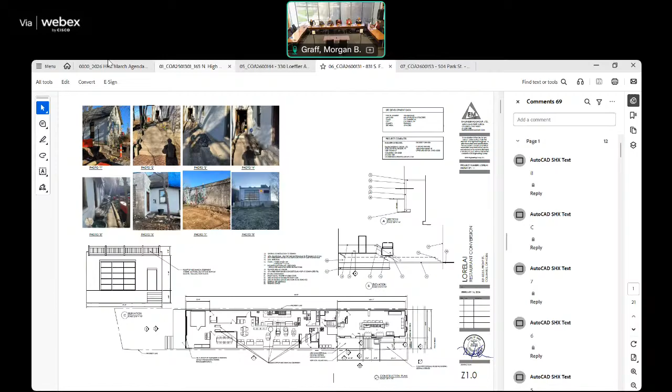On to certificate applications for certificates of appropriateness this evening, starting with the continued applications, application number 1, COA 2501301, that's for 165 North High Street.

Is there anybody here for that? If you could come on forward. And we need to make sure that microphone is on real quick. Perfect. If you could actually stand up real quick, I gotta swear you in.

Raise your right hand. Do you swear to tell the truth in testimony before the commission this evening? I do. If you could state your full name and association with the property for the record. Christopher Jolly of Darin Ranker Architects, the architect for the project.

Wonderful, thank you. All right, Morgan, I'm going to get set up here a little bit, guys.

Thank you very much. All right, so this is to convert second and third floors from offices to apartments, remove existing fire escape on the north elevation, and install new egress stairs to meet building code requirements for apartment conversion. Staircase to be painted vintage gold, install new 6-foot steel security fence around the bottom portion of the stairwell, convert 2 existing windows on third floor and second floor north elevation to new full light aluminum egress door with transom, convert existing third floor door on north elevation to new 1/1 window, and repair windows on front, east, and north elevations.

The application is in response to a code violation from September 2024 for the removal of sashes without a certificate of appropriateness. HPO staff conducted a site visit on September 9th to view the current conditions. As noted by past staff, there is a mix of window styles on the property, including on the south elevation arched 1/1 windows, 9/9 windows, and 4 stained glass windows. The north elevation has 4/4 windows and 9/9 windows. On the east elevation there are 1/1 windows with decorative transom, skinny arched windows, and stained glass with entryway.

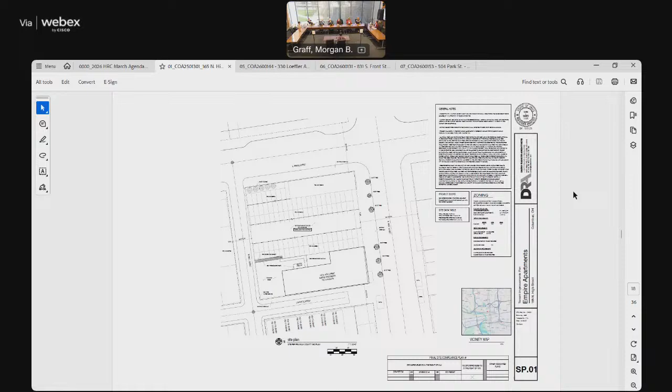Thank you, that's all. What would the applicant like to add at this point? And then we can open up to discussion.

I'd just add that the majority, or all, of the windows to be repaired were essentially vandalized, from what the owner's told me. So they're looking to repair those to be like original. Any missing sashes are not on the property, nothing that I've seen or the owner's aware of that exists.

So they would need to be recreated to match the existing windows. There are different pieces and parts of different windows that are missing, but I think there's plenty there to be able to match what we have, using adjacent windows to know what that configuration is and make that match happen.

As far as the internal layout, last time it was discussed, we looked at how that would affect things if we left the fire escape where it was, and that's this layout here. So we have a tiny studio apartment in that upper left corner, off to the left side of the plan, and that size configuration would not meet building code.

The entire unit is only 232 square feet. The combined living and kitchen space is only 160 square feet, whereas building code requires 190 square feet. A separate bathroom and closet space are also required, in addition to the 190 square feet.

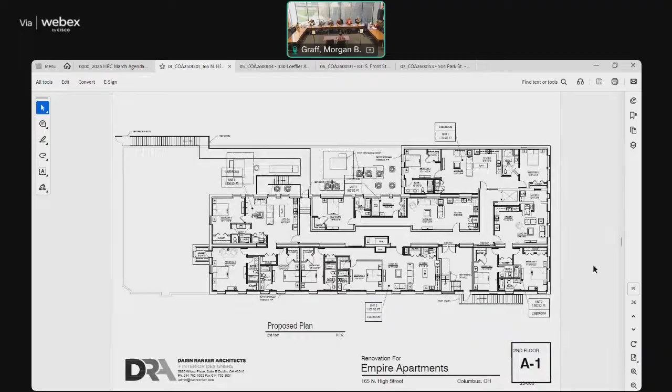Did you receive a copy of the comments we provided in the packet, to submit any revised materials or additional follow-up so we could get some of the questions resolved? No, I've not seen those prior. It's in the application under the portal—that's where they're normally uploaded for business feedback, always.

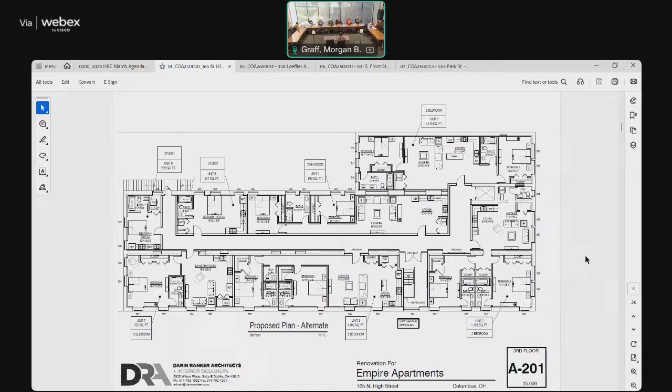We just want to make sure you get feedback related to the fire escape, especially because it is going onto what is a legally separate parcel, and that BZS is comfortable with that, since you're extending onto another parcel of land, even though we believe it's owned by the same entity. We want to make sure there's no other technicalities—you may need variances or other things to address and appease them. We don't approve variances, but we are a recommending body on that kind of thing, so there's some due diligence that still needs to be resolved there.

I would open that up really for the conversation to the rest of the commission here for other things that the commission saw. We generally don't rule on the inside. We have no authority or jurisdiction on the insides of buildings such as this. But we did want to know what was the impact or what was driving this, looking to put a new fire escape in. Thank you for at least the information on that. But I'll turn it over to other commission members.

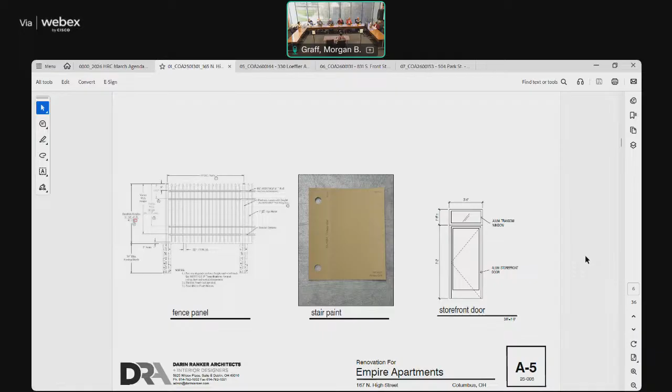I would like to address the railing and the gate. It looks like the gate, I'm assuming that's probably aluminum. It looks like it has vertical members with little spear tops.

We've allowed that type of thing before, I think. However, the railing on the staircase is horizontal, so you have vertical elements and horizontal elements bound together in the same configuration. Generally, we have not allowed horizontal railings on historical buildings because that's more of a 21st century aesthetic. If you made those vertical, that would maintain consistency with the gate you're proposing.

And we may want to talk about the gate a little bit more as to whether or not that's the appropriate look with it. But certainly there should be consistency between those, between all the wrought iron or the aluminum metal work.

Really good point. I think you've raised most of the questions I can think of. Were there other questions, or is this comments?

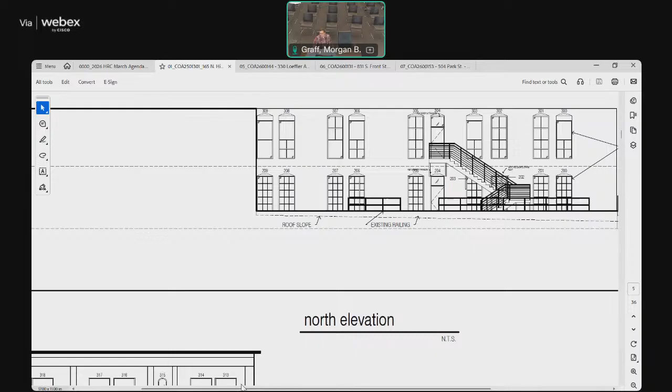Is this your first time in front of the commission? December previously. Okay, but this is your first big project in front of the commission?

Yeah. Okay, all right. I would encourage, I think we would all encourage you to work with the officer here so she can help you with where stuff is, and if you have any questions about any of the feedback, we're happy to help. I get that it can be overwhelming at first, so we'd like you to be successful.

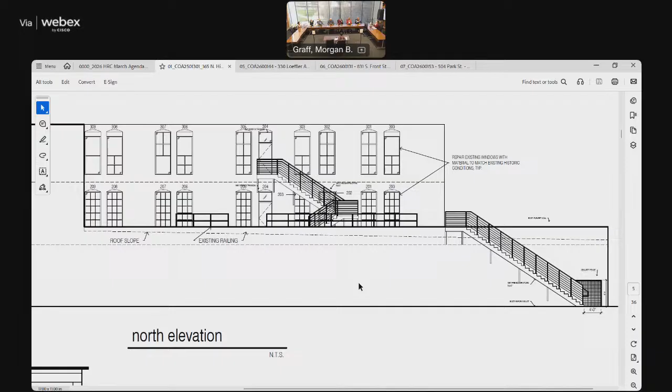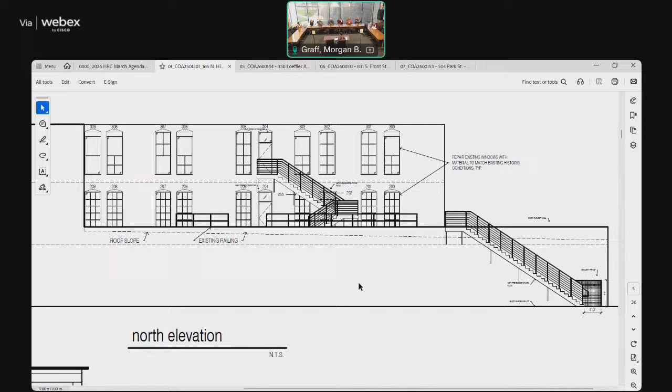I think with the layout, I appreciate your explanation of why the new location. Did you study rerouting the hall in a different configuration, so it wouldn't necessarily have to be exiting that way? It could come horizontal on the paper for a bit. So if you jogged elsewhere, does that create a different potential pathway for preserving more of the existing door opening? Or does that create a unit problem?

Yeah, it just makes, when you start, you end up with a Z-shaped hallway. So it just kind of ends up being a little funky on the inside with that configuration, and you end up with some pretty skinny spaces on one end or the other. But that could certainly be looked at, it'd just be a little bit.

Yeah, you might do it and we might say that's not reasonable to request that. I think usually we try to exhaust the different options though, and make sure it's understood that the current configuration doesn't make sense as it relates to code. But just make sure, when you resubmit and come back, that you feel like you've really exhausted all the options and can show that to us.

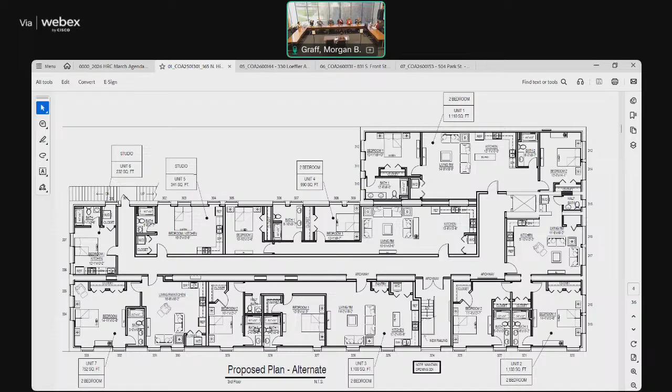The other piece, I know you've been working on this, and I appreciate the progress we've made with how you've documented all the different windows, because previously it was hard for us to understand which windows were getting which treatments and what kind of condition each of them was in. So the key is really helpful with all the photos, so appreciate that.

The one piece from the business meeting that I still had a question on, maybe some of the other commissioners did as well, was that your detailed catalog here looks like it's showing windows on elevations which aren't drawn. And I'm still a little confused about which elevations you're proposing repairs for completely, because we're only seeing, I think, mostly the north and the east facade, north elevation and east elevation.

And then in the plan, you have window numbers on both the south and the west as well. And then it looks to me like there are detailed photos of windows on the south and the west as well. So that's the part where I still haven't figured out completely where all you're proposing changes to. So the elevations were provided for reference because mostly the exterior change is really just the stair.

Any of the other windows, the only change to windows is moving the one window for the door. Everything else would be looking to restore it to its previous condition. So that's why we don't have necessarily elevations of the others drawn. It's just images of the condition and noting what we would need to do. But for this window...

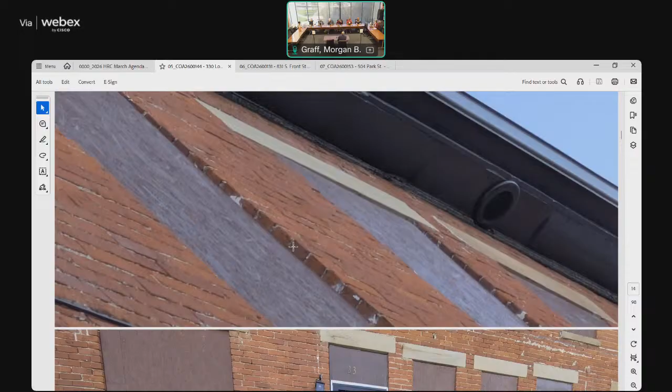We conducted a site visit on February 12th and noticed other changes that have been made since that prior approval: installation of 2 security doors, new front entry sconces, new exterior outlets next to the front entrances, inappropriate mortar application and mortar type, installation of laundry ventilation through the soffit on the front and rear, and installation of house numbers through the brick.

The commission asked the applicant at the past March business meeting to provide detailed drawings of how they will be finishing and trimming out the dormers on the front. The commission will recommend cladding the dormer cheek walls with recycled slate or alternative wood cladding instead of the proposed asphalt shingle. They would not support retention of the security storms or security doors, but would consider a full light storm. They asked the applicant to provide reasoning for the installed venting in the soffit, and the commission requested a fence drawing detail to show what the screening for the AC equipment would look like.

At this time, no revised materials have been submitted. Staff recommends approving application 2600144, 330 Loeffler Avenue in the Bryden Road Historic District, as submitted with the following clarifications noted.

Clad the exterior dormers with lap wood siding with a reveal between 3 to 5 inches. Final paint color to be submitted to HPO staff for final review and approval. Clean up the mortar on the chimney. Remove existing security doors and install a full light storm door, with product specification to be submitted to HPO staff. Submit final fence design and fence coating to HPO staff for final review and approval. And install house numbers through the mortar, and patch voids in the brick.

Basis for the staff recommendation is 311611, standards for alteration, as well as 311613, standards for site improvements, and the Columbus Register of Historic Properties, chimneys, pages 28 through 29. That's all from us. Thank you, Morgan.

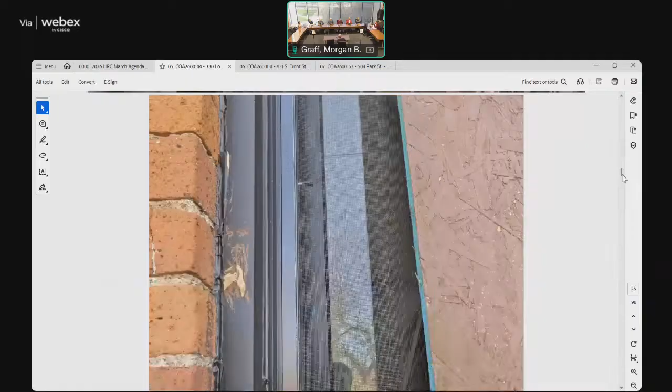That was a pretty lengthy, but sorry, in-depth report. I do want to note for the commission here, staff's recommendation here was to move a lot of this to them to resolve and work through, and you feel comfortable with that potentially as a recommendation? Okay. I know no additional material has been submitted, but I would like to open this up to you to add whatever you may want to add before we have our own discussion and see where things go. It's the first time for me, 30 years in the business, but I've never had this situation.

The contractor took her money, so she's gone. You walked into all this? Yes, it was all... you've done nothing?

I've done nothing to the exterior other than cleaning it up for the HVAC contractor. We have to put the outside splitter unit and the condensing unit right there where those bushes are, so we're in the process of cleaning an area up for them. But everything else we've been doing is interior.

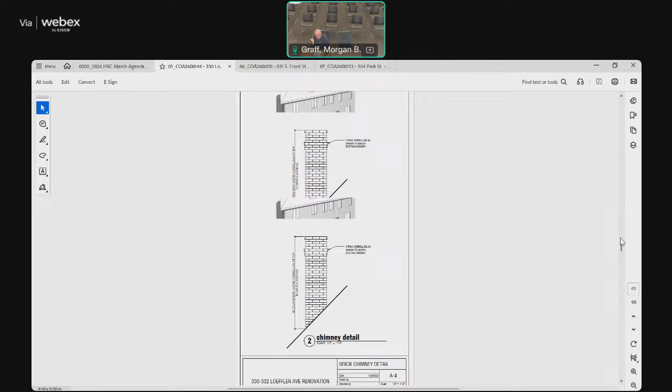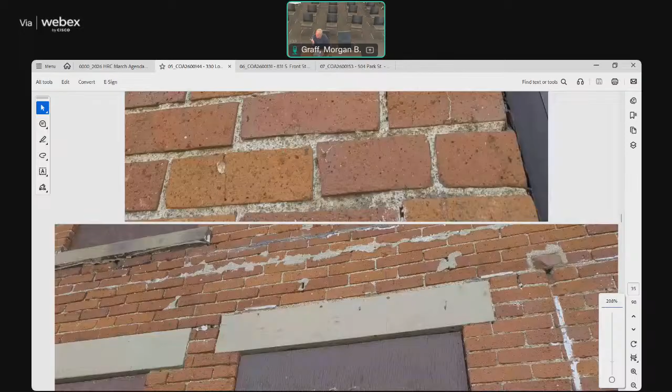The previous contractor did the soffits and venting. We put two... they didn't vent the bathrooms on the third floor. The third floor was converted to living space. We did put two boots on the roof for the venting for the HVAC bathrooms. The previous contractor put those in the soffit.

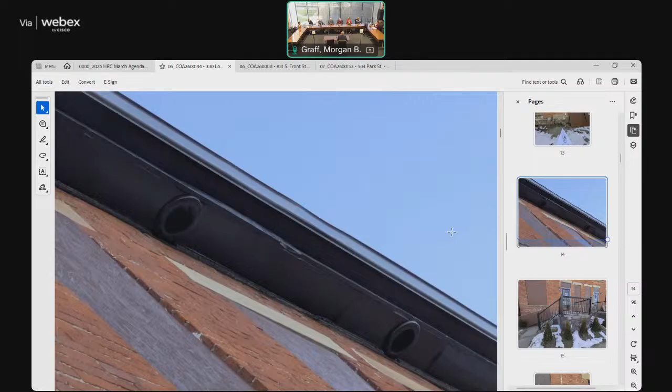We have, in unique circumstances, had a few of those actually occur before. I think the last time we saw that was maybe in the university district. We've had that specific issue, but we wanted to hear why, what was going on, when things just happen on the building sometimes. It's not that we're going to be inflexible, we've just got to know why and what happened.

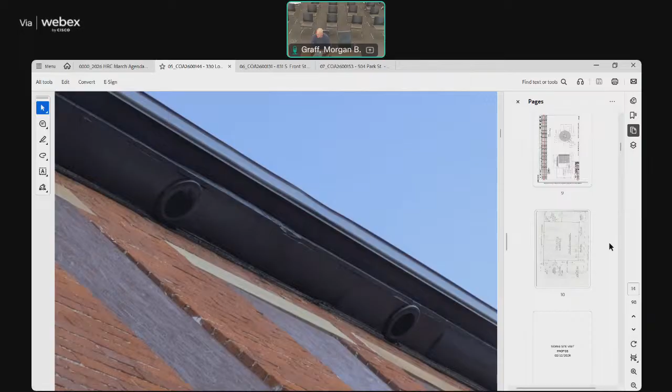The laundry is on the second floor now. They designed it for us on the second floor. So, I mean, we could find a chase to get to the roof probably, if that's not acceptable at this point.

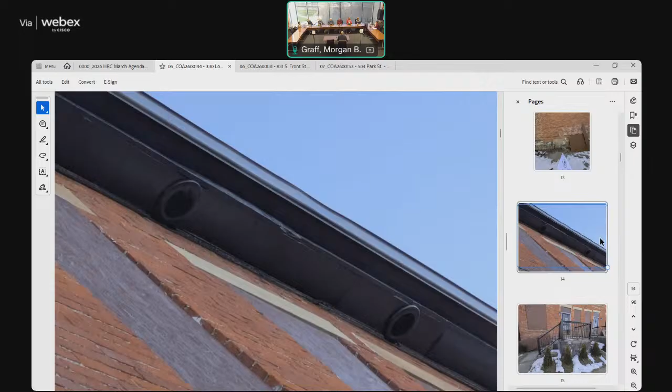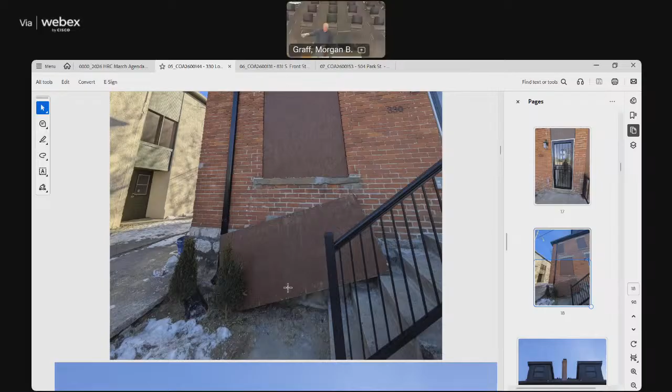That's why I'm here, because I want to know where I'm going and how to get there. As far as the downspouts, it's concrete everywhere, so I don't know—do we run a pipe along the perimeter to the front and then pick that one up and kick it out? Well, unfortunately, I don't know that we could give you the advice on that. We can only give you the advice on what you're going to propose for a solution.

That's really a stormwater issue, I think, with the city on code. So you would have to see what BZS and the building department's going to require from a stormwater treatment standpoint. But your design solution, you would then seek approval from us—we can't dictate the building code and the permitting process and what's going to be required for how to treat the stormwater.

Okay, so we're only proposing the final solution to you. And I don't know if building and zoning services or the permit department's going to require any calculations, those kinds of things. I don't know how many units trigger handling stormwater differently. So I don't want to say we can't offer that advice, but whatever you end up needing for a solution based on whatever they tell you code is going to require, and whether it involves a designer or not, I don't know—that's when you would bring that next step to us.

Right, so a PVC pipe from the back to the front, laying against this building, exposed—is that possible? I don't really think so. I don't know that we've ever had such a thing. Typically it's buried below grade.

But again, as Commissioner McCabe's saying, just check with BZS for code purposes. If you do get to that point where you are going forward for the drainage, you can always reach out to us—that could be something separate, because that's something we typically can review administratively. Because you don't really want a downspout running across the building at an angle down to the front.

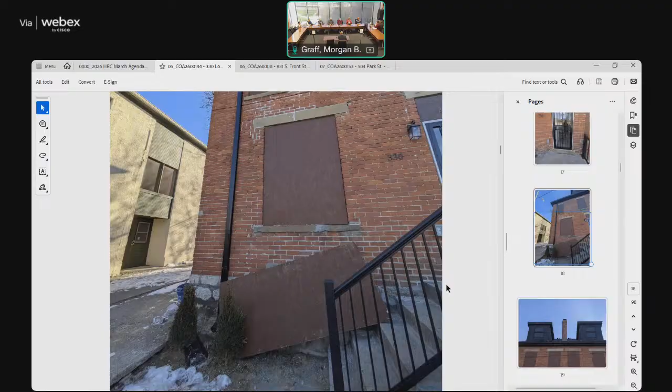When we were referring to it before, that code violation—it was more, I think the contractor before had like a half downspout on the building instead of a full length. So if that's what you're referring to, Glenn, for that one, yeah. Okay, and then another issue is the tuck pointing, so it's kind of convoluted.

You gave me a couple of pictures circled where the graffiti was, there, and a couple other spots. What's the determination as far as, this is the homeowner saying we do this part, and then you come back and say well there's this part. So is there any kind of a rule as far as where you're saying here, well you need to do this northwest corner, southwest corner, chimney?

I think some of the issues is there's really poorly done tuck pointing. That's new work, and it's not consistent with the historic guidelines and what you see in general historic practices. I think we're very concerned because, was the correct mortar used? If not, it's going to cause more damage to your brick in a very short amount of time. But we definitely have to, it's very obvious. Morgan can probably scroll to a picture of really badly done newer tuck pointing work.

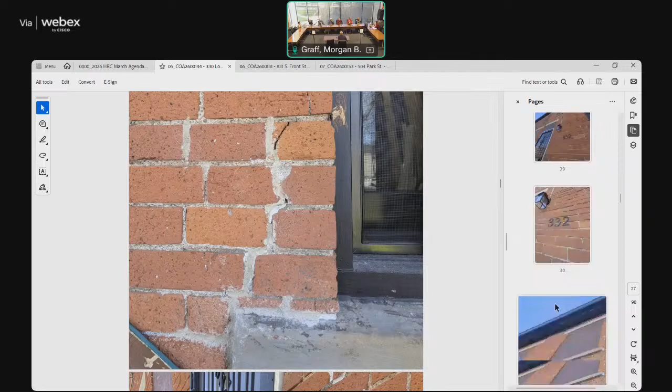Yeah, that front, they did some stuff on the front. And then the sandstone foundation, they did all that in, yeah, that's a good example of where it's kind of halfway done. So, is there a standard of where this void is too deep, so this needs tuck pointed?

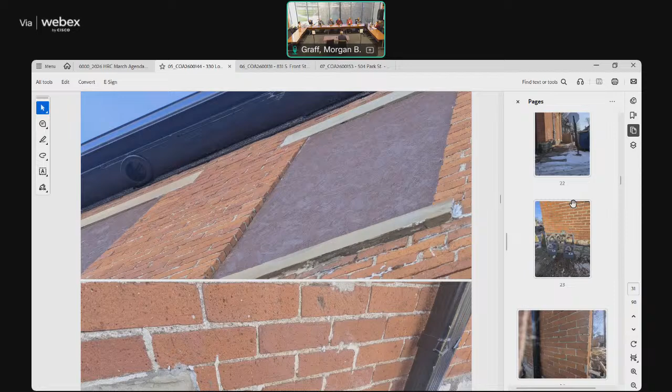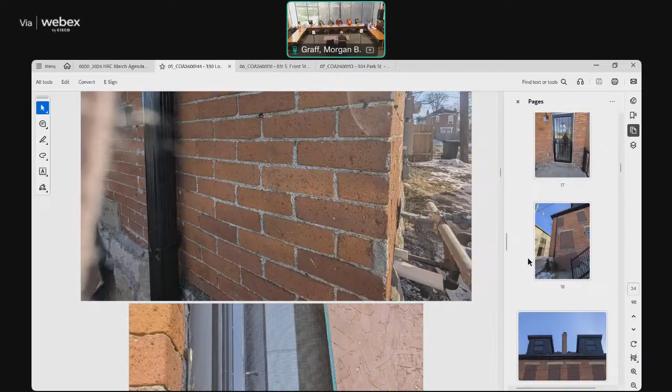What I'm going to say is I'm going to defer to the guidelines. We do have guidelines and there is city code on historic preservation, read up on that. And really the type of mortar needs to be submitted to preservation staff for approval. I think they did, type N and the coloring looks to be matching, so white Portland type. So really, some of this may be alleviating some of the cleanup.

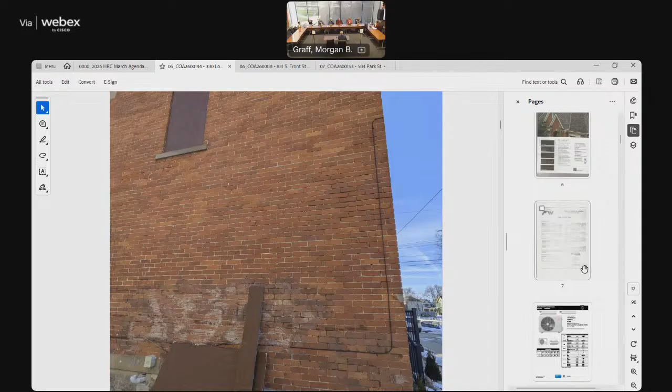And probably there's some spots you probably want to get a little bit more watertight, and the chimney just needs cleaned. What about the size, where they made the chimney bigger or something, that one? I mean, that's really, I admire they put the chimney back. They tried, but the tuck pointing just really ruined every effort to put the chimney back. And they also put it back in a different place than where the original one was.

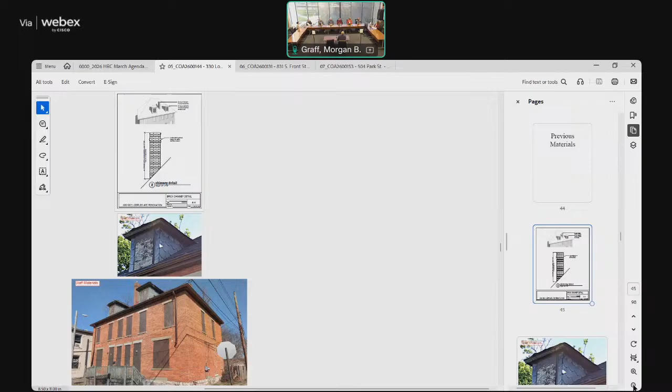And they also made the dormers bigger, right, even though it was approved to put the chimney back in the original place. There's even a drawing showing that. However, I guess that's something that we need to decide, and looking at it, you're not responsible for it. I think I can live with it. I think it's an element of the design.

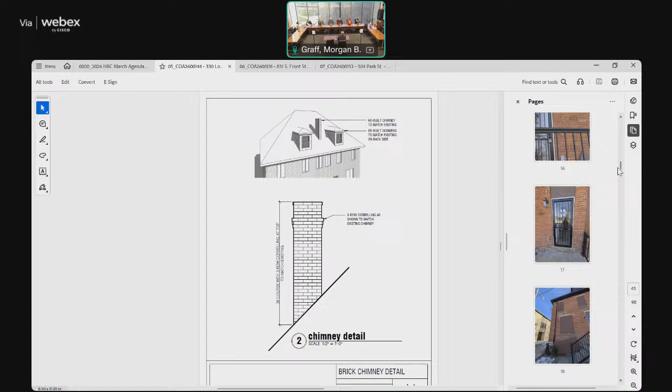Does it still serve the same purpose, a few feet further? It's probably okay. And it's just floating, right? There's nothing under it. Right, and the chimney? I mean it doesn't, yes that's between the two units, so that goes to the firewall, basement, sits on the firewall, goes to the basement. That's actually where we're using the chase to get the splitters up.

Because they didn't want them on the outside of the house. So is it where the original chimney was? 'Cause yes, oh there we go. Oh then it's okay, that makes sense. Okay, that makes sense because in the drawing it hugged it to the, in the drawing it's further up on the roof. Yeah, and that's where we're confused. So okay, so you're good on that, we won't worry about that.

A little bit of cleanup on the dormers. I personally am okay with the larger size, but let's talk about how you're gonna finish the surface on it. I think you've got some idea. Staff ultimately recommended, consistent with what I think a lot of the commission sort of thought was okay to go, which is, even though it isn't original, a cladding.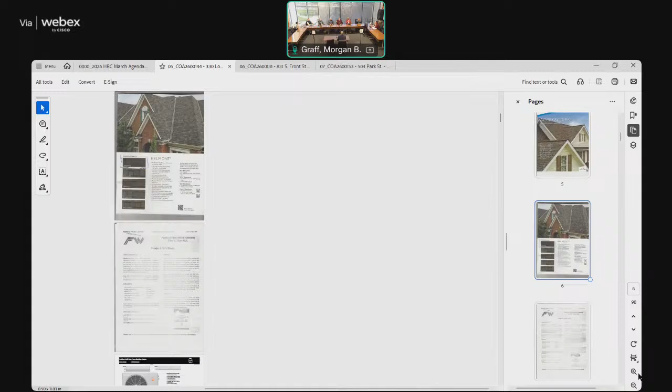A slate, you pick up slate, it looks like slate. I don't need that either much, I mean it's gonna cover that thing in slate, or we were willing to say okay, go with siding, but you have to have trims at the corner and you have to have the trims at the head, sill and jamb of the windows. And somebody's just got to sketch it up and show where the 4-inch piece goes, what it looks like.

I think we were all willing to compromise, and even in the staff report there's a compromise recommending that you're able to clad it, though slate would be a much better choice if you want to win some favors. It was an option we left out there, but you have to propose something, and we have standards on that. We'd look at it to make sure it makes sense - what a decent proportion, size, and corner configuration is going to look like, what it's going to look like with head, sill, and jamb conditions with trim, and whether it's wood or smooth face Hardie, or recycled slate for the dormer treatment. We can't be your architect - you have to propose to us what the corrections need to be. But the slate synthetic roofing materials, no.

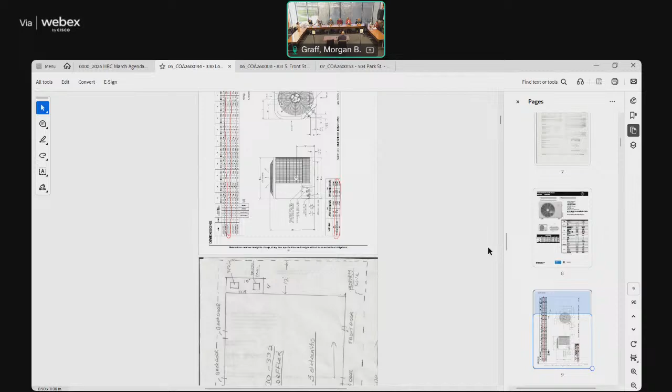So it looks like the recommendation is to move to staff approval. The one I'm curious about everyone's opinion on is reinstalling the house numbers and patching the voids in the brick, since the brick has already been damaged. Is it better to pull it out and reinstall it and then patch the brick, or just leave the numbers? I know we don't want to encourage that behavior, but I don't know what's the lesser of two evils. I think it would be better on the brick not to pull them out and re-drill and do all that.

We might be in a better place to overlook this portion, because if you look at where those holes are, between moisture and re-drilling, those bricks are going to crumble. See how close those are to the tops of the bricks? There's going to be nothing left, and there's maybe no way those are going to hit the mortar joints either, even if you moved them or did them at an angle. The pre-drill on the numbers is definitely not going to match up with the mortar. We could put them on some kind of flat plaque instead, and that way you're not doing more harm to the brick except for the plaque.

But I guess the fair question is, is the damage already done? Is it better just to leave it as is until a future replacement of the numbers occurs? I'd tend to agree, especially if you look at how close it is to the edge - you're going to pull that out and you're still going to have the hole. You can't undo the hole. But if we put a plaque over it, would that protect it? If you put a plaque, then you're just creating a bigger element on the brick and the brick's still gone, and maybe creating a moisture trap. I'd rather just leave the brick the way it is right now.

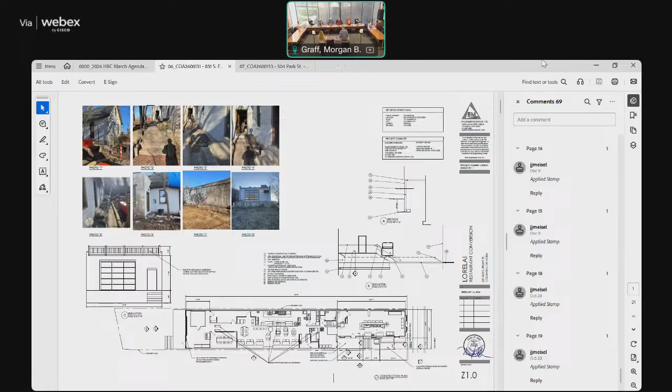If you could both remain standing and each raise your right hands. You each swear to tell the truth in your testimony before the commission this evening. Yes, we do. And if you could each state your name and association with the property for the record. Bronte Clifford, I'm the owner of the building. Scott Malley, the architect.

This is to convert a vacant building into a new restaurant, install new rooftop mechanical equipment screen on the rear roof with bottom and top rails and 1x6 slats to be painted black, remove existing steps and grade along the south entrance, remove existing limestone steps from south-facing entrances, regrade walkway entrance to be level with the public sidewalk, walkway to be concrete, and install new concrete steps closer to the entry door.

Install a concrete slab over CMU block for the entry stoop, new 36-inch metal handrail and 42-inch guardrail, and a new incline platform lift on the south elevation, along with removal of existing limestone steps from south-facing entrances. The property owner received previous COAs for painting and roof replacement.

From past records, it appears the steps and entry walk were redone around 1994, which included replacing the existing concrete steps with limestone steps. Looking at current photos, it appears the current steps are made of concrete with salvage stone brackets, while the two south-facing entry points have limestone steps.

After further review of the property, it appears the rooftop mechanicals were installed prior to approval, as well as a new garage door, repoured concrete step and porch, and gravel pad on the rear. The applicant responded, noting that the rear elevation work was performed prior to the current owner owning the property. According to the applicant, the rooftop mechanical equipment has been placed on the roof for storage.

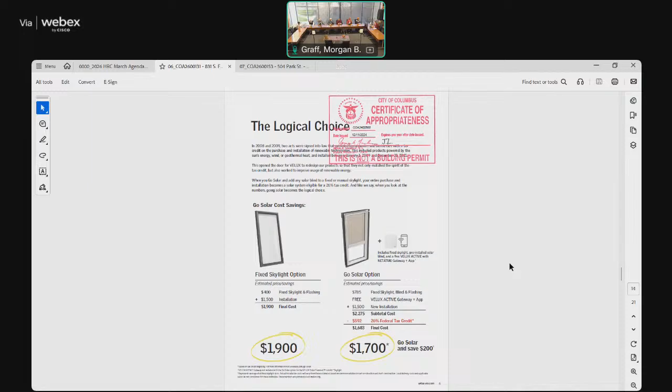Regarding the side of the property, will this expose the existing foundation? If so, what is the treatment plan for the original foundation? How will the lift be installed? Will it be on a railing or on the elevation of the building?

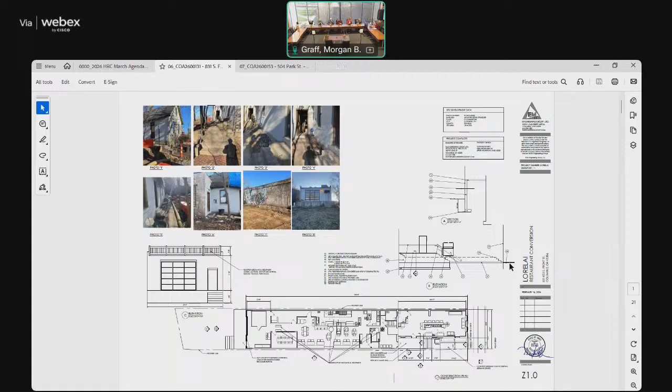Commissioners asked the applicant to provide landscaping, if landscaping is to be included, and to clarify that all entrances and openings are being maintained, updating the elevation drawing to include all openings on the south side. Commissioners should offer design feedback that can be utilized by the applicant to further refine the proposal for review at a future HRC meeting. No action is required. Basis of staff recommendation is 3116, standards for alteration.

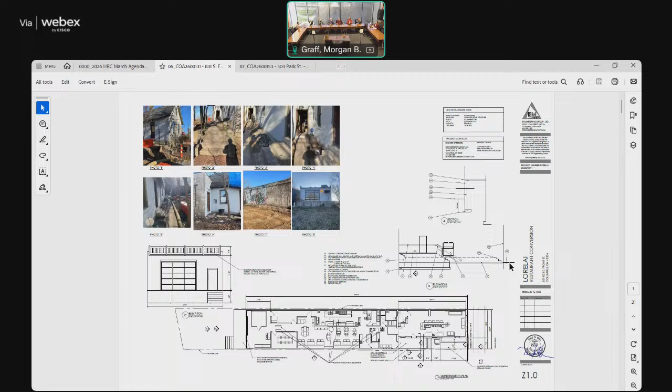Thank you. Wonderful. It is a conceptual review, so I'll open it up to you to add some color here and talk to us about the project.

Well, we talked last week about getting rid of the railing in the back, since we don't need it, can't see it. Everything is moved forward. There was a miscommunication in my office, the revised drawings did not get sent back in by the 12th.

But as per our last meeting, we're getting rid of that railing in the back, as long as you can't see the equipment, I think. Not at all. Most of us were fine with that. The railing actually added more of a distraction than anything, and it wasn't really appropriate for the historical context of the building anyway.

Right, so like you say, the rear door and the landing in the back were done previously. I don't know if you need us to do anything at this meeting or next meeting, but that wasn't brought up last time, so I didn't know.

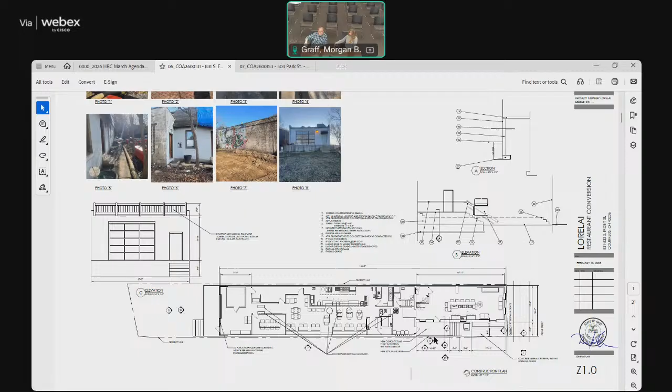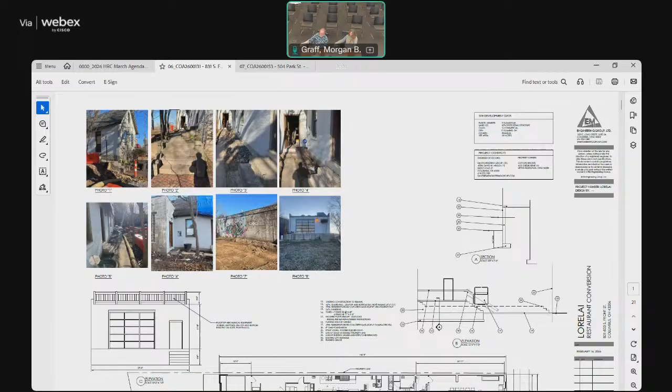If anything, just walk around the exterior alterations for us. Where we take out the front sidewalk and lower it to the street level, it's going to match the front of the building. It's the same stone, except on the side, I'm sure it's just full of dirt. The front is the same thing, they've just mortared in between each one, so you can see all the stone. There it is on the front.

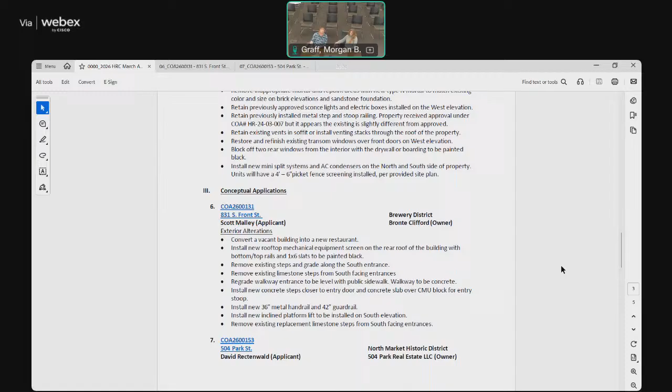We're going to use, well, they wanted to use simple pipe railing for the handrail, but you've denied it, so we're going to go with a wrought iron. What I would ask on that is just submit a drawing. And it needs to be vertical from what I heard last time. Yeah, typical wrought iron, that's a good cue, you're safer to propose that. We can't prohibit you from proposing anything you'd like, but given the character of this building, I've never seen vertical or horizontal wrought iron too often anyway, and those gaps have got to be filled in so the kids can't fall over the edge.

Yeah, we're proposing to do that same stone all down the side until the new landing. The doors are going to stay. So what'll happen is you've got these 3 or 4 steps up right now for the sidewalk, you're gonna take that out, that's gonna be excavated out, and more of that foundation wall is going to show. So you're then gonna re-tuck point that foundation wall that will be showing, is what you're saying. Yes, and you're just gonna leave it exposed down the entire length of the side then? Yes, it'll match what's there.

What's going above the door? You're gonna have a custom transom or something, or from the opening? There are 3 doors right now to get around that side of the building. We're building the ramp to match the 3rd door. The other 2 are just going to be hanging in space. Seal them shut.

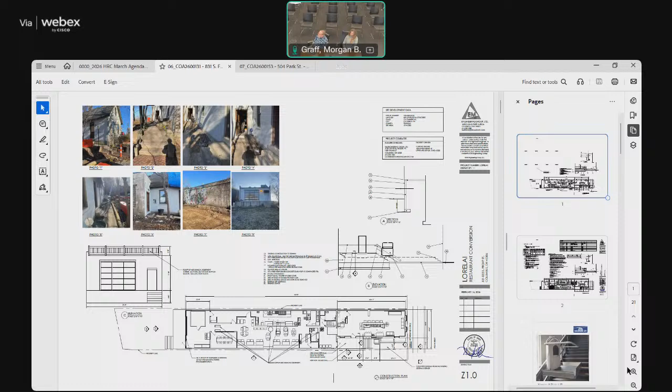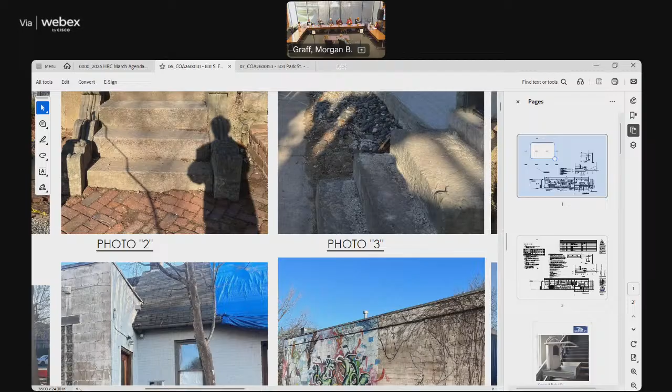So that's the first one. Right, and which of these 3 are gonna be dropped? Or does it mean all 3? You're not dropping any of them? I thought you were reducing the height to get down further, or no?

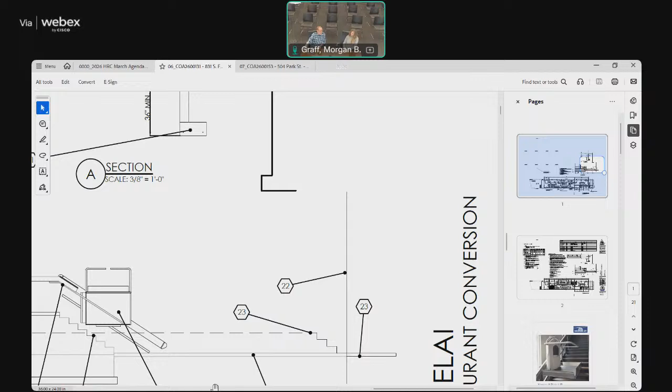I misunderstand. The grade is going down lower. The doors are going to be hanging in mid-space when the sidewalk goes away. There'll be a door here. I see, like 3 non-conforming steps coming out of those doors anyways.

So we're going to bring it up to the first 2 doors on the inside. There's like a 4 to 8 inch difference in steps, I forget what it is. So we're going to ramp up on the inside, so the 2 doors are higher than the other door. We can't make a match, so we're just going to leave those other 2 doors there and build the ramp up to the 3rd door. It'll be the main entry and the fire escape from that area.

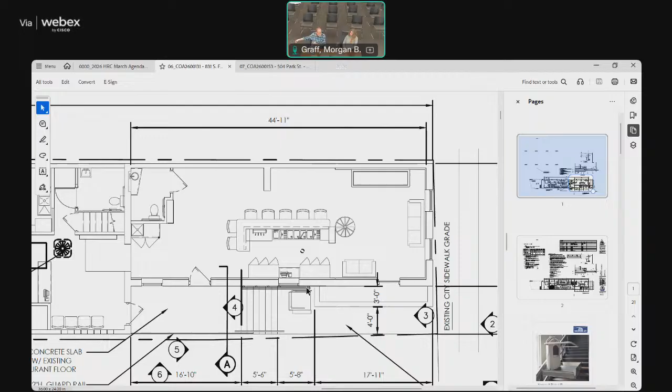But you're gonna have to cut through existing material to do that. Great dirt, yes. But we're gonna bring the grade down to the street grade all the way back to the ramps.

And next door, we're not worried about because they're building something a whole different. So right now it's a vacant space. They've got ideas, but it's too far behind this space for us to worry about it. And I apologize, I don't know this.

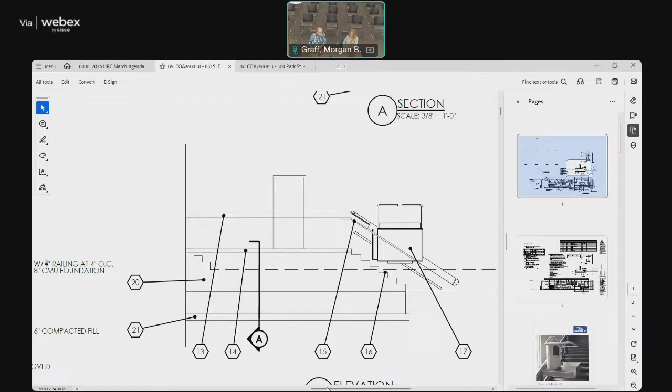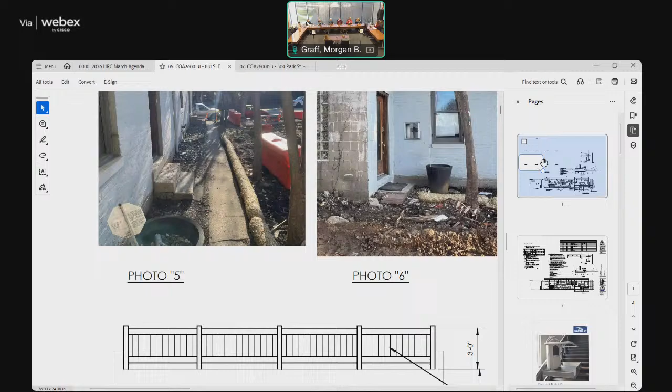Is next door the empty lot next to the Jones Hill building? I don't know the names of them, but yeah. Jones Hill building is the one where it's the tall vertical warehouse in the back that they're redoing into apartments. Jones Hill is the sort of container in the front, low, like 4.5 maybe. And then they're putting a maybe four layer, very modern building inside that container.

So Brewery District ended up having to tear out a historic house to make the egress work for the bigger project, painfully. So that's what you're talking about. You're right next to that. Yes.

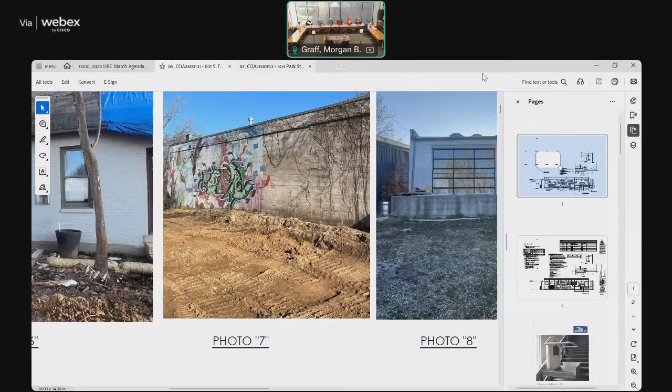On that, for lack of a better word, plaza that you're putting in there, there's an item that's 3 feet wide under the doors that are to remain. Is that just a little landscaping box or what is that? A future landscaping box, maybe using some of those stones that they're taking out around the stairs. That's what I thought, but I wanted to make sure.

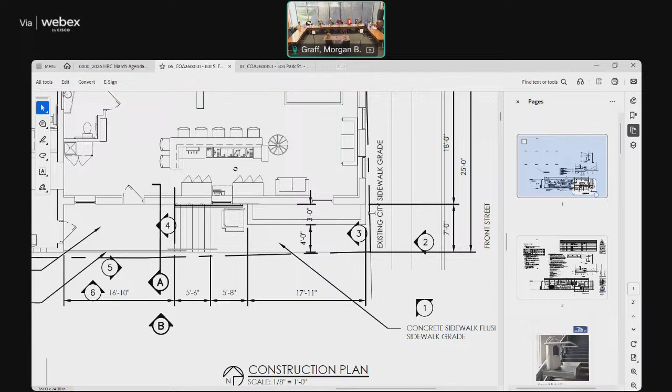Can you go to the picture, Morgan, that's of this condition? There's that collage of photos. Keep going up. Right there, photo number 3, slide up a little. There, you can see the steps that are coming out.

And those do look like historic material that'll get removed, those steps. But a couple of steps are just stone, big sandstone pieces, right? So my thought, if you wanted to, we take some of those and at least line a planter and have some plants above, in front of that.

Foundation wall. Why not leave original material when possible, supporting keeping them, unless you need the access or something.

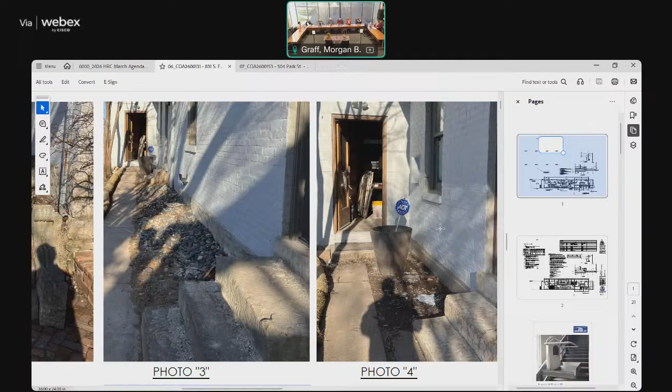Well, the issue they're having, Stuart, I'm not gonna speak for them too much here, but they're trying to deal with the ADA access on the front and getting the runway. Got you. Right, and those stairs don't at all meet code width, so trying to save them, they'd need a lot of work anyways.

So the only way to do it is... and it's not wide enough to put a ramp and then a sidewalk up to some stairs. There's just not enough space there to do so much.

So we propose just to bring it all down to street level so you can at least get back, I don't know, 8 feet or so from that back door, go either up some stairs or there'll be a lift, and the lift will be attached to the building, a fold down platform, whatever it's gonna be.

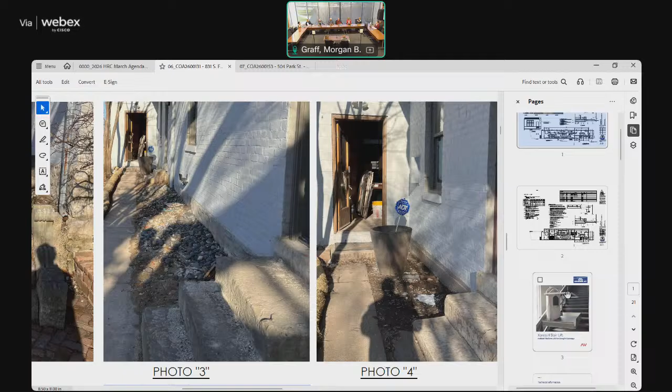So you're saying if and maybes, are you following the plan you provided though? Yes. That's gonna be the one thing that's gonna be critical, because we're trying to give you conceptual feedback, not changing anything except for getting rid of that thing over the back of the building.

The hand railing is gonna stay the same, different material. The stairs will all stay the same. Where we propose some landscaping will stay. It's just... How time sensitive are you? The drawings would help a lot. Oh yeah, I understand, I understand.

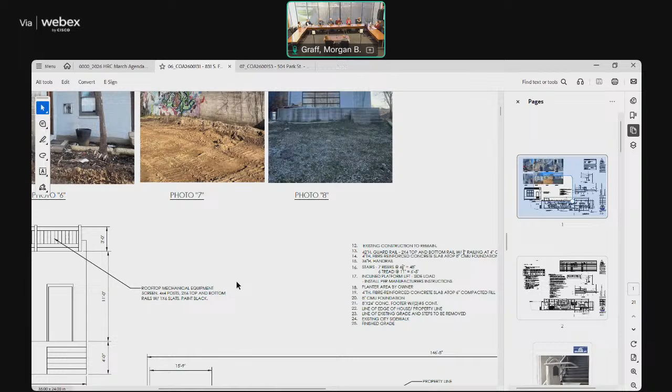I need to see the drawings, cleaned up and finalized, before I make a whole lot of comments. If you want to do the planter using recycled material, give us a sketch so we can give you approval now, and you follow those drawings so you don't end up like some other folks here who just did things randomly. We want to help you succeed.

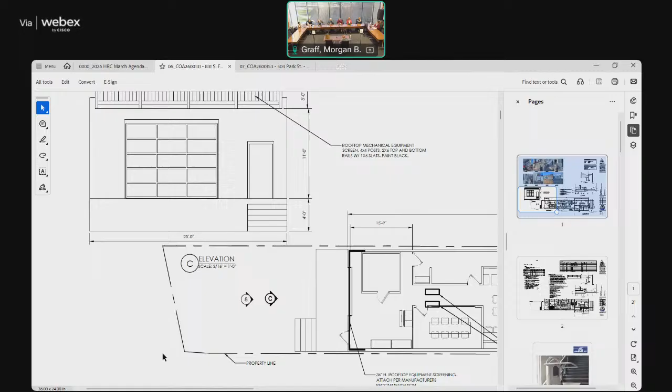How far is that back where you're grading from the street? Is that 30 or 40 feet? Let's see, 17, 5, 5, 10, 27, 43, 40, 45 feet. Almost 50 feet. Okay.

What's the code for that ramp? It's about an inch per 12. There's a ton of room, you don't have an issue. Good. We've looked at ramps and there's no room for a switchback at all, so a lift is all we could do for stairs. So that's fine.

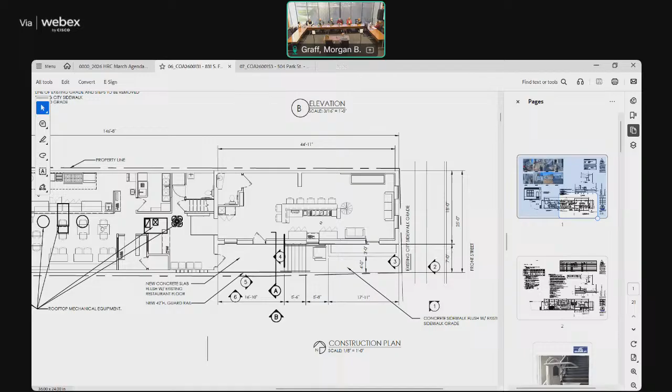And the back of the building is just impossible to get up. I almost feel like what they're proposing is the lesser of the evils. I think so too. I was just trying to think about how that would configure. You'd even need to have breaks in it. I think we put a planter along the side to hide some of that foundation.

The concern we're struggling with is that those stairs are original fabric to the building. We generally want to protect original fabric, but there are cases where we understand you can't. So we're trying to decide if this is a case where we can't. The conclusion I'm coming to is that it's a life safety issue, a handicapped accessibility issue, and we have allowed those issues as reasons for exceptions.

To simply excavate out and leave the stairs there as pedestals doesn't make sense either, because that would be dangerous—kids would climb on them. The bottom step would be right, 3 feet above the ground. It would just be a historical artifact, but a dangerous one, since some skateboarder would be doing crazy things on it.

The bigger picture is you're preserving the bigger chunk of fabric, right? The building's gonna stay, you're gonna keep it occupied and livable with heat and all the things. So I feel like that's a small compromise in this rare instance. I'm agreeing with you—we lose two sets of stairs, but the rationale is life safety and handicap accessibility.

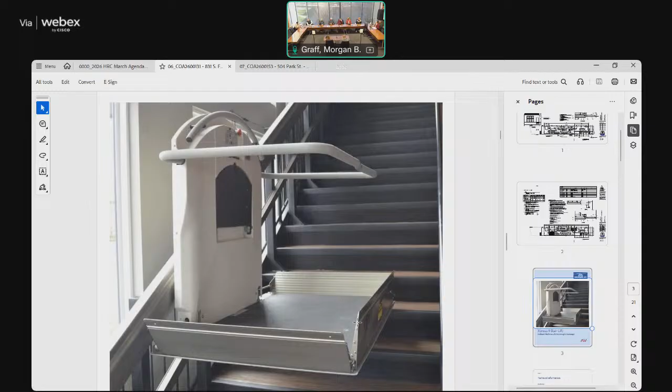I think the vacant lot belonged to Jones Hill. It does, right? I don't know what their plans are. They were having trouble with the edge of the building and the property line that wasn't clean in the design, so I thought they were going to work with you, with the owner, to try to figure that out. It would be helpful for us to see that.

Yeah, we've been trying to work with them, we've talked about easements, and it's just nothing. We've looked at the feasibility of everything else and this was our only option. We just need to understand what it is now, as you develop your designs, which I think is what the commissioner is asking for.

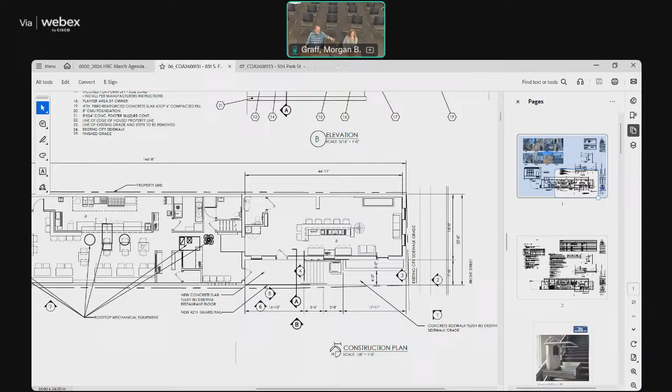Well, our site is included. I have not included anything beyond that. That dash line is just our site, that's it, but it's just that. There is nothing, it's all building. The empty lot is not theirs, so we cannot cross over there.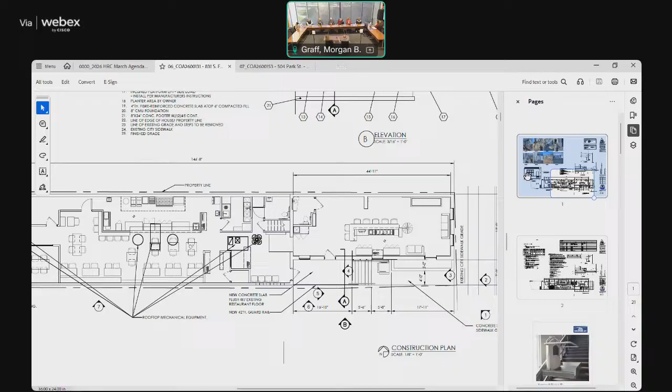And we don't know what they're doing. They've tried working with them and coming up with a shared entry, but they won't move fast enough. So they want to get open, we want some good seafood here, so to get that, we've got to provide what we can do. And if they get off their duff before this thing gets built, we'll be back in front of you, but for right now, we've got to move.

So real quick, I want to note something that as you get ready to do your final drawings, this would be very useful for the commission and for documentation purposes. You kind of had just a piecemeal elevation of what would be your south side. Can you do a full elevation on the south side? The reason being, in here there's some CMU block that's a later addition, and you've got some glass block.

Please note those glass block windows as being existing already. Because our commission generally doesn't approve glass block, but you've got an existing condition already that was already there, that you didn't do. I just want to make sure that's very clear for the record. It helps us for other reasons. And don't extend any more glass block on those buildings, but it'll help your package become better.

And then it's good to just see the full elevation as you do that, show those doors remaining, clean up all that detailing stuff, all the things you've talked about here, just make sure it ends up in drawings. So that when we see the full package of drawings with railings and everything else on it, we're truly getting you through this process and off and running. And I will say that the current photos submitted aren't the most recent current photos.

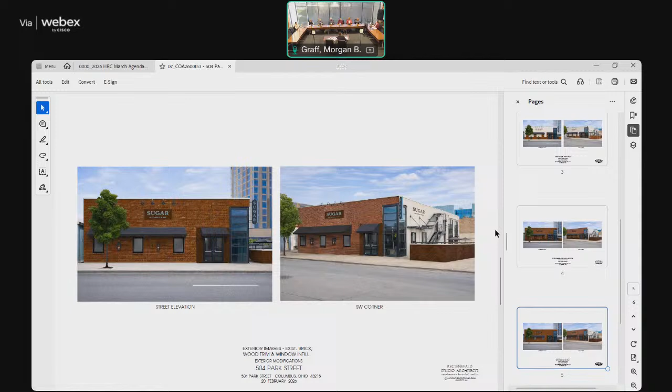Even though we've given options, what I want to make clear is we are not the architect. We want you to tell us which option you'd like to pursue. You've heard feedback from staff, you've heard feedback from our commission. We can respond to what you tell us you'd like to do, but we won't blatantly just pick options for you. So I'll turn it over to you to lead us. If you need to go up there to point to anything or have her change slides, we can do that. I just want to leave that as an option for you as you're presenting.

Understood. Well, I have a preferred option based on what the owner would like to do, but once we got staff feedback, we're going to try and make something else work. And then the whole idea was for me to take whatever I hear tonight and come up with a final design solution and get it back in. Right, so that's kind of where this was going.

The main solution here is painting the entire building this off-white, which goes with the concept the owner's trying to put forth, more of a Mediterranean, Spanish type of food concept. They want some of that to come through on the outside and be evident of what the menu is and what the concept is for the building.

So a little bit of wood and the off-white paint, keeping some of the existing elements of the facade. There's the illuminated light boxes we talked about. There's been a concept of, can we just put a false window in there? Or can we somehow run the chevron pattern up and put in a light fixture that's a pedestrian type of wall sconce, make it work that way. They are wired, so all that's still there. There's an opportunity to maybe do something with that, or we just go back and make it a false window, that's another option. So we're not sure exactly what the commission might want to see with some of these details. But the main issue is painting the entire building this off-white, and the windows and doors black, continuing that theme around the building.

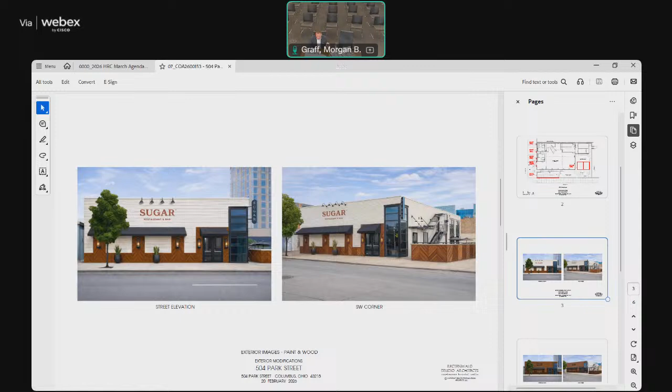Should we hit on that a little bit more? As far as that's concerned, the front elevation has already been altered to an extent that I would ask, do we really need to maintain the brick color? If we maintain the texture, wouldn't that be enough? And isn't the children's theater next door painted brick? It was previously painted, so that's down the river and not an issue.

What's been changed on the facade when you said decimated or whatnot? The corner there, when I think in '99, when Bar Louie went in, they erected that very contemporary looking corner window to activate the corner of the property. And then obviously the main door. So that corner window was added in 1999?

Were you in the commission at that time? Let's see, 05, 04, no, 03. When did this become a district? Staff, still familiarizing yourself with these smaller districts or whether... 99 might have been right before it became a district.

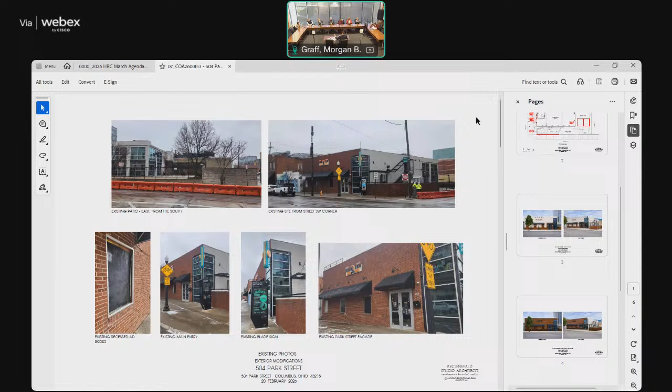Or if it was, it's a code violation, you need to remove it. Is that an element that you want to incorporate into the design? Assuming that it's there, the corner, no, I want to leave it the way it is. I'm just saying it's no longer brick where it was brick before.

Now we have the advertisement boxes that were punched in here. So all of a sudden we're starting to change things over time. And those weren't windows originally, because there's like sills and that sort of thing. The three on the west elevation.

I think we're asking you this too, though. In the original drawings from '99, those openings were being turned into illuminated advertisement—is that what those boxes are? From windows to the left, how do we approach those? Interesting, might help us a little. This actually does change our opinions, maybe, potentially—it just gives us a little more thought.

But you know what, hang on, I'm completely wrong. The other drawings are from—these are from '06. Okay, let's see, '06, we'll go from there, we'll see. Oh yeah, yeah, we can also share them down the road here.

Can't see anything down here—or existing. Right, so they were windows, and that's when they put the bathrooms in. But there's still openings, and we do allow an opening to remain an opening. They're painted black sometimes, or various things, because we don't—kind of changed it. Yeah, there should be doors or something here too.

Reminds me of the structure of Borchers that we've been working on, right? With the proportions in the low window. Oh look, there was like some kind of structure up here, I too do recall—that's all gone now, the metal that was on top of that, sign frame.

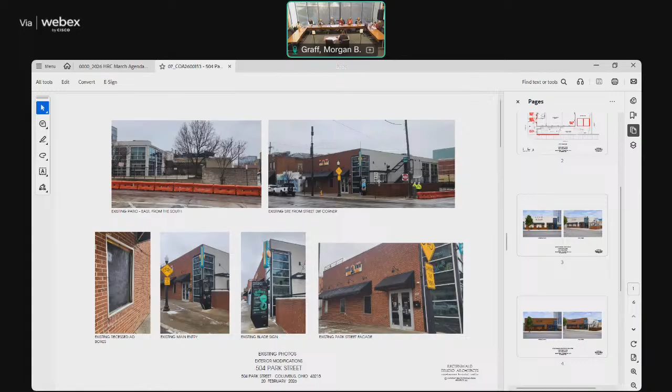My other worry is I think one of your renderings also showed putting wood treatment on. There's this low wall that comes off the right-hand side of the structure and wraps down the street, and that is all red brick right now that matches the red brick on the facade, and it would be good if you could not put all that wood on. I have doubts that the wood will hold up long-term given the challenges of this environment - road, sidewalk salts, water and everything else. So one wonders if you could set up these alterations without covering over as much of the red brick as possible.

I brought that up, but they wanted me to press on with this - we want to clad that brick and get rid of the red brick, it doesn't work with the concept they'd like to present. So we would just encourage you to be creative, to engage with the red brick and create a concept that does work for them.

And that brick came at a later date, correct? It's not like the textured brick that's on the original facade, completely different. Yeah, that's a newer wall. I'm not sure the date of when that was constructed, we could find that information, but it is newer - the red brick is newer.

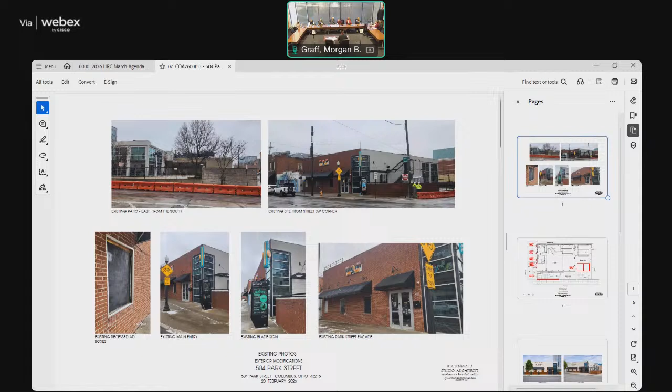Wait, for the wall itself, right here - to that little wall? Yeah, okay, if you see the patio rendering, the patio, not the wall, the red brick of the facade. It's just a flat common brick, normal stuff, not the textured brick that's on the main facade.

I don't think we care about the little wall. Doesn't matter? It's the building that matters. So I'd ask - is it though, or is it now just a hodgepodge of stuff? Yes, of course it's a hodgepodge. Is it a good hodgepodge or a bad hodgepodge? Well, that's why he's here, to pull it all together, so that it doesn't read as a good one.

Hodgepodge, which is why I'm asking - why not paint the whole building and get one whole uniform look? If you want a uniform look, have you considered covering the CMU wall with brick to match the front? No, that would be almost financially impossible.

I don't think you will get support to paint the brick, the front facade brick. I think we're pretty much all on the same page there. You won't get any.

Okay, so that's paint. I'm just trying to exhaust the possibilities, that's all. I think you can consider that up. We will attest to your client that you tried, that's fine, you did a great job. I just want to get him the best solution for his business. Otherwise, if he can't get the main thing, I know he's going to start backing off on stuff.

He may just do a sign and call it a day. I don't want that. I want him to clean up the property and the building and add to it, but also want his business to be successful with the concept he sees and he wants to do.

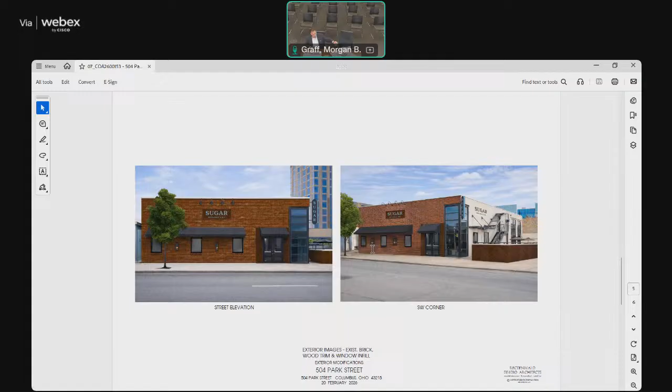I don't know if we decided, but the existing advertisement boxes with the brick sill—should those be covered over? No? Good, they can use them as a false advertisement window. Would you infill it with a false window with a black frame? 100%, that's fine. That's the easy way out of it. Brick it in, don't put any glass block. No, don't pop them out and put windows in.

If you want to put a sconce in there, what was the original? Was it a one-over-one window, or was that the original? Can't say for certain—was the original one over one?

It's not clear. This reminds me of the Borchers Building down the street on Front Street, in the Brewery District, which is very squat, with those two little windows in the front door—same thing. And that was one over one, right? Very 50s, 60s style. Can we find an example of that?

I think it's also in our pack records—again, maybe we missed it. Likely one over one. We're beating this to death. I feel like, I don't know, replicating windows that aren't there. That's fair, but I'm less worried because they clearly replaced all the other glazing on this whole thing, including the corner and all the way across. That facade to me is kind of iconic.

Don't change the height, width, or depth of the opening. You can do whatever you want on the inside, but keep the opening the way it is—that's basically the idea.

It's just going to be a metal window—whatever you want to do in there. Plug it in, and it's already got batt insulation and metal nailing framing on the inside. So when you say plug it in, you don't mean electrically, right? No, plug in a window unit to make it look like a real opening—infill is a better word.

Okay, any more questions on that? I think staff has a question about whether we'd support these aluminum prefabricated trellis structures. My view is that they're sort of temporary—they have a lifespan. They're not going to be there as long as, say, 15 years, and they could blow off and hit somebody.

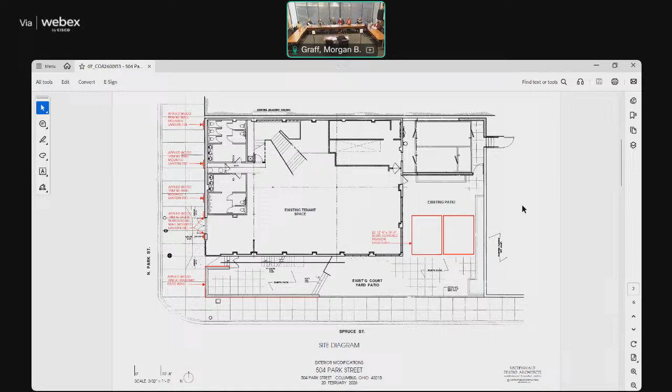They're going to be taken down and replaced. I feel like they're in the furniture category, and it's not attached to anything. We've approved things like that before, on pergolas, putting cloth on it, even on rooftops—and some covered in wood. So I'm a fan.

He's being funny, just kidding. Last one picked up on that. So the pavilions are okay with this group? I think it's cool. I think it just fits in with the idea too. Right? Okay, very good.

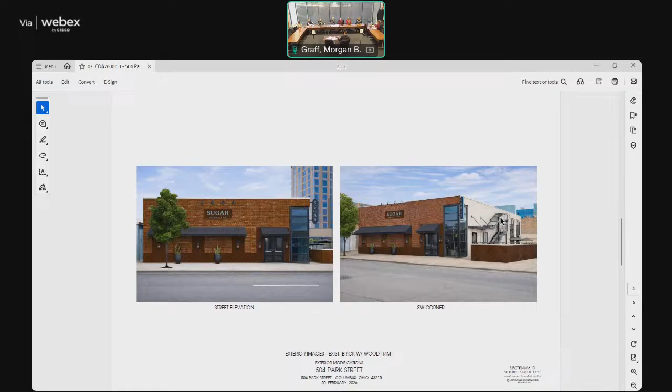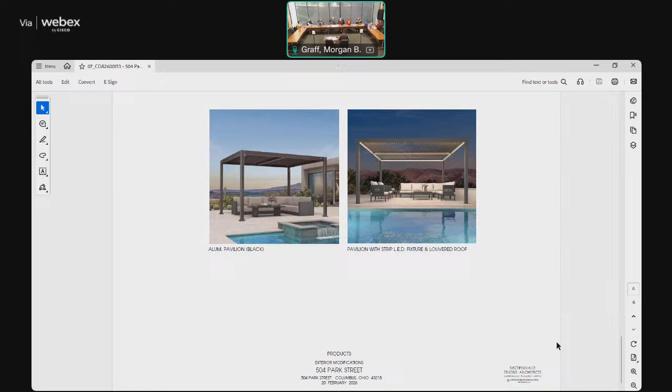They're just louvered, and they do have an LED that's controllable - you can close the louvers with a button, all that. Are they the kind where you have fluorescent lights immediately underneath each louver that you can see from the street? No, terrible. No? Okay, what are they? They're an LED strip mounted on the boundary, not inside each louver frame, and they are controllable - dimmable, correct. No colors, right? Not that I'm aware of at this time.

I think that's all for this. What I would love, by the way, in follow-up, if you cannot give these to staff now, I would love for you to follow up and give a set of these to the staff, for the 1999 record, because these are the kinds of things that really help your case. And the 1999 ones, if you have them, the signage, any old drawings you have - if you could submit copies of those to staff for their file, it actually helps build the case for why we're gonna be able to potentially vote in favor of a project that's gonna further alter this building.

I do have a PDF of the entire set. Pass that to staff, they will then pass it to us, that helps. You can scan and include that, send it in the packet. This came from Morgan. Oh, it did? Okay, yes, that one did. Perfect, you have it. All right, just making sure. You seem very prepared - we have that one ready. Okay, well, that'd be helpful.

Thank you, appreciate the feedback and the discussion this evening. We'll give you as much feedback as we can - quickly turn drawings to staff during the business meeting too, so you don't have to keep going. You give us a glimpse and we'll see if it's gonna fly or not. And if you're really having some concerns, don't go to a full set.